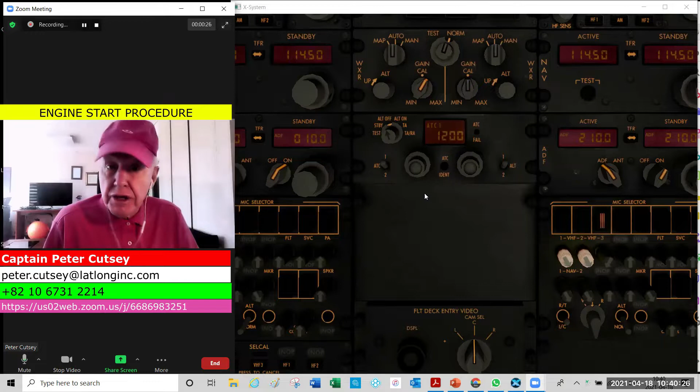Ready for pushback? I've just asked the first officer to get pushback clearance. We have received pushback clearance from ground control, transponder down and out. Then the first officer will go up to the packs and turn them off after selecting the lower DU to engine display. Before we do that, let's look at what the FCOM says.

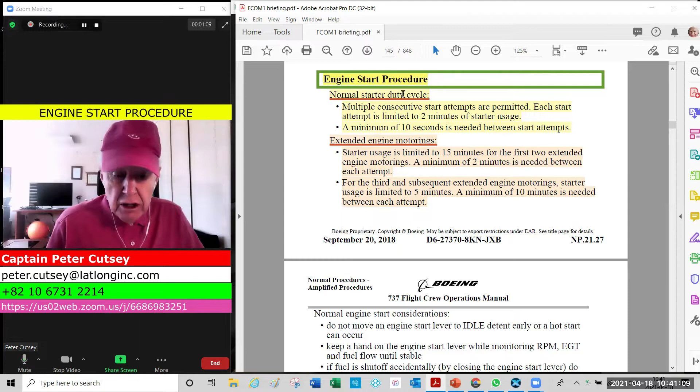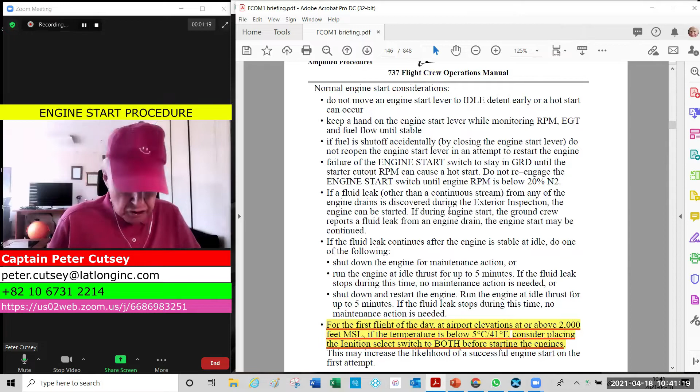You should be aware of this. This is directly from your manual. I've highlighted things to make them easier to study. You should know the duty cycle, the normal duty cycle, and also the extended motoring time. The rest of the information is all important, and we're going to discuss it briefly in a supporting PowerPoint.

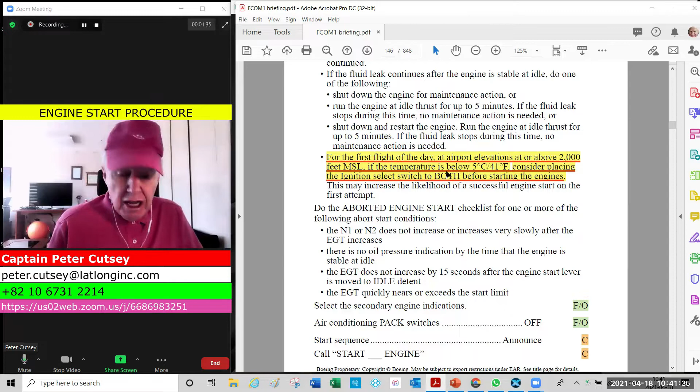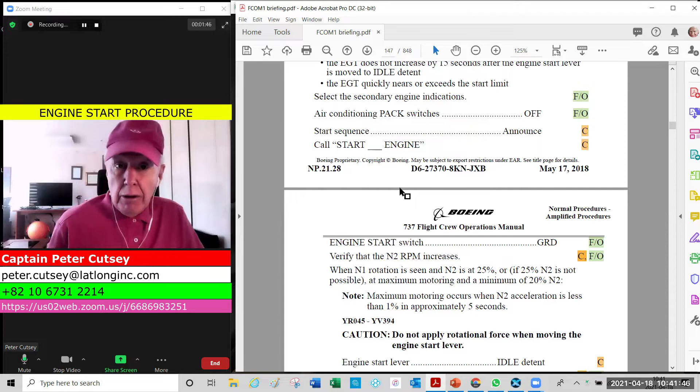One thing I've highlighted: for the first flight of the day at airport elevations higher than 2,000 feet MSL and a temperature of +5 or colder, you should consider selecting the ignition select switch to the both position. I've highlighted the first officer's and captain's duties using Adobe Acrobat Pro, not changing the manual, just making it easy to study. I find it helps me to actually highlight things when I'm studying.

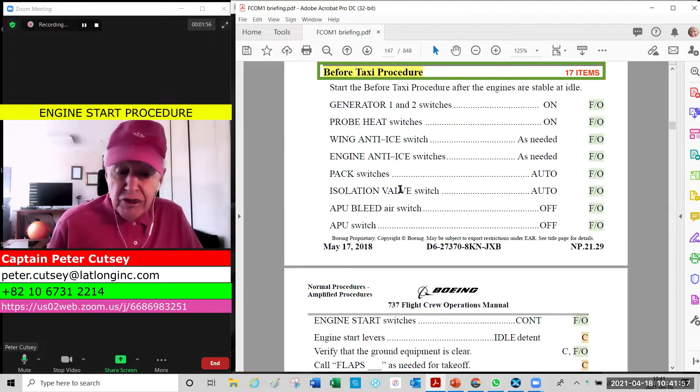I'm going to set the next procedure there ready for our next video. Let's get down now to the main engine start procedure, and I've broken that down in this supporting PowerPoint show. Pilot monitoring, first officer, select secondary engine indications, make sure the air conditioning packs are off, and then on the captain's command, start number 2 engine start switch to ground.

Verify N2 RPM increases, and when N1 rotation is seen and N2 is at 25%, or minimum of 20% at max motoring, the captain will move the engine start lever to idle detent. Start his clock running for a 15-second count on EGT indication, and the first officer starts his clock running for motoring time if required later.

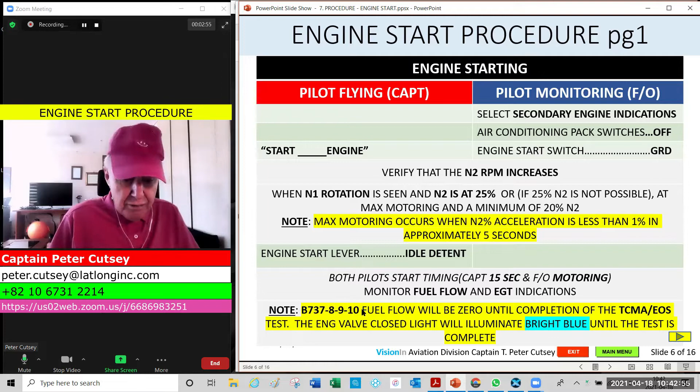The statement here is for the max, we'll get into that at a future briefing. At 56% N2 on the NG, verify that the engine start switch moves to off. If not, move the engine start switch off. Verify that the engine start valve alert extinguishes when the engine start switch moves to off, and call starter cutout.

If you notice, the normal engine start procedure is silent except for the initial command by the captain of what engine to start, and then the first officer's comment when the start valve closes with the comment starter cutout. That's all it said.

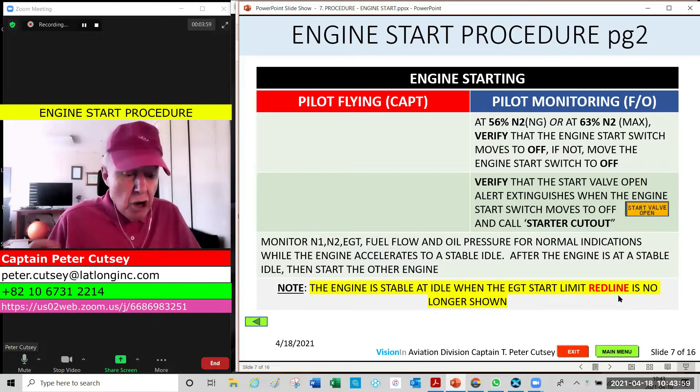For this reason, you should be monitoring N1, N2, EGT, fuel flow, and oil pressure for normal indications while the engine accelerates to a stable idle. Remember that the engine is at stable idle when the EGT start limit red line is no longer shown. You do that for both engines.

Let's get right into the start procedure. Flight deck to ground, go ahead Captain. Parking brakes released, ready for pushback. Parking brakes confirmed, parking brakes released, commencing pushback, clear to start engines number 2 and 1.

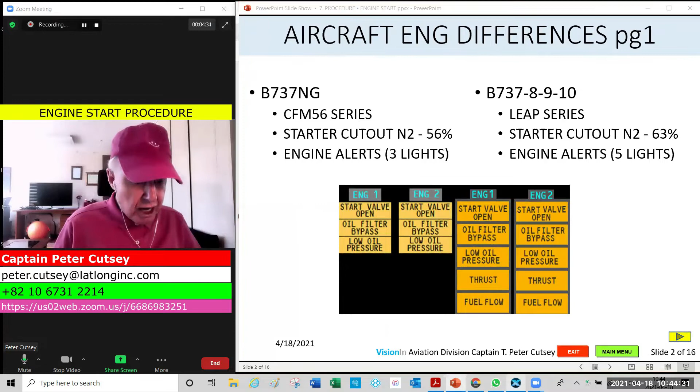In this process now, the first officer will go up, and on my command of start engine number 2, we'll go up to the overhead panel. We ensured that the lower DU was displaying engine parameters, and we'll go up and make sure the packs are off.

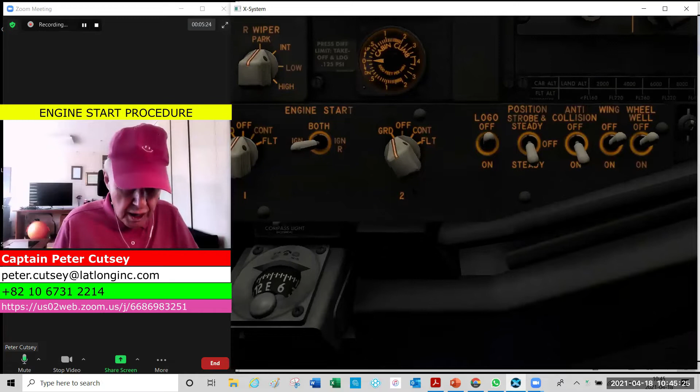We have 25%. So engine start lever to idle detent, and the clocks are running. There's the red line limit we were talking about, and when it actually disappears, you know you've got a normal start - and we have a normal start.

Now the captain can ask the first officer to go ahead and start engine number 1. The engine start switch did move to off, and the start valve open light did extinguish. So on his command, start number 1, and he noticed the engine start valve open light - we can see it there.